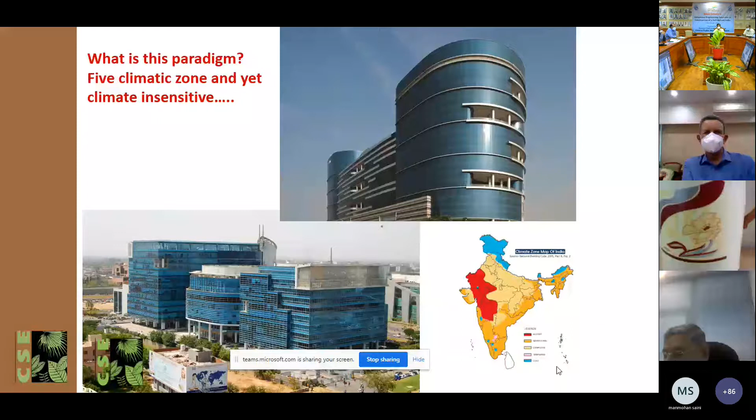Primarily, what comes out as a result is that we still do have burnt brick structures which are dominating. But when it comes to major urban centers like Delhi NCR, or even Kolkata and Bangalore, we do see that monolithic concrete structures are now making a lot of entry, and we also have certain environmental green materials in terms of fly ash and AAC coming along with it. So this is the landscape which is presented to us.

But the situation is that we are talking about something which is indigenous, what belongs to the local roots and could be utilized. So where is that landscape going to go? For example, in the last 2-3 years, we have seen a lot of migrants move back to their parent locations, and the housing industry was also disturbed to a great extent. But this poses a challenge as well as gives us an opportunity to recover, and to recover in a green way.

So why green recovery? Because we have to now sit down and understand - because we were there in our housing and we understood why we were locked down at home. We understood what works and what doesn't work in the kind of development we are in right now. So that poses a big question, and materials as well as technology become good answers for that. There is also a lot of employment opportunity associated with this, particularly with housing as a sector in mind.

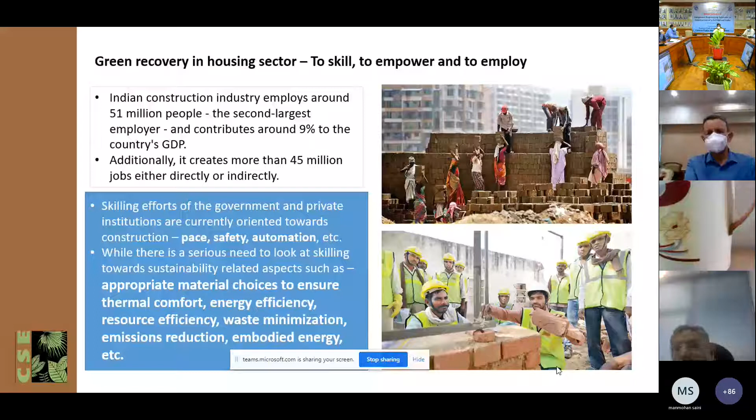We've taken an overall look at how this pandemic has affected things, as well as the economic dislocation and humanitarian crisis. So there are benefits by which a green recovery can help. Climate change becomes an important intervention. Improving thermal comfort, livability conditions, and maximizing livelihood potential are three important areas for us to intervene.

So we've taken a focus area coming from West Bengal and Orissa, because there were roughly around 5 to 6 states involved.

Have we lost his voice? Is there no sound coming? Rajneesh ji, you are not audible. Please rejoin again if you have issues, that may help. Call him and tell him, call and talk to him. We have some technical glitch, I think Rajneesh Sarin's microphone is not working. I think the presentation is also stuck, it's not moving forward, otherwise the slide would advance.

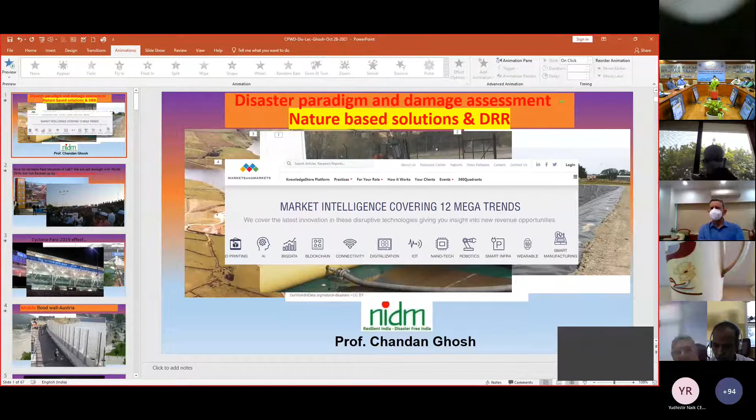What is this? Yeah. Okay, yeah yeah, okay, it is seen now. Yes, we can see it. Please continue. Okay, so let me speak in English or Hindi, mixed. You wish, sir. Sir, speak in mixed language, mixed. Yes, why speak so much English? Yes, when there's so much closeness in Hindi.

So my topic, of course you are all engineers, nothing new, but we all have been so busy, especially civil engineering, especially dealing with dams, probably the oldest thing civil engineers have handled even before we existed as a discipline. Dams were there for survival of civilization, with many uses, and of course a lot of controversies. My focus is on disaster paradigm and damage assessment, leading to mass scale construction, and what portion we as civil engineering fraternity handle so passionately, yet ignore so impassionately.

So in that respect, I will take things to the disaster paradigm. Even though we have codes, manuals, SOPs, guidelines, practical examples, pilot studies, performance studies, testing - so many areas of specialization, like in the medical profession also - still things happen.

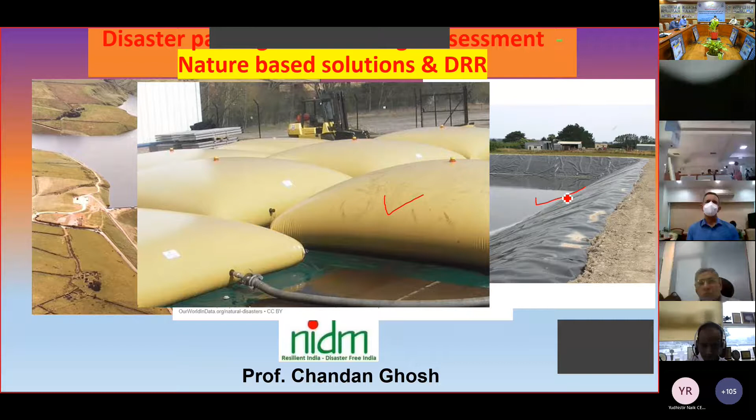But we are bringing these things now in an elaborate manner, since such construction is almost not possible these days. So alternatives we are searching for, and many alternatives are there. So while we talk of disaster risk reduction, there are many other alternatives. We as civil engineers, along with the community, depending on necessity and arrangement, look for low cost, minimum effort solutions rather than a gigantic effort. So we must go into some kind of micro storage before we take up disaster risk reduction into our life stream.

Despite that, the whole world is going into market intelligence, and we have been identifying the trends. In fact, these days, most of our engineering young students are moving towards computer and artificial intelligence, big data, blockchain, connectivity, digitalization. So this is software, all in all.

But when we talk about the hardware like this, we are not way behind, but we have to make ourselves aware of this. Even though we have done it, we are making 100+ story buildings or monuments and many other things. We have to come in.

Before going to show some glimpses of what has gone wrong or what might not go wrong, every year we used to have some kind of mock drill or building pull-up for disaster preparedness. We make it, and a lot of people participate, coming with an NIDM cap. So we do a lot of awareness at Pragati Maidan, which is getting modernized now. This kind of practice and awareness generation has been the hallmark of awareness generation across the country by NIDM and many other institutions.

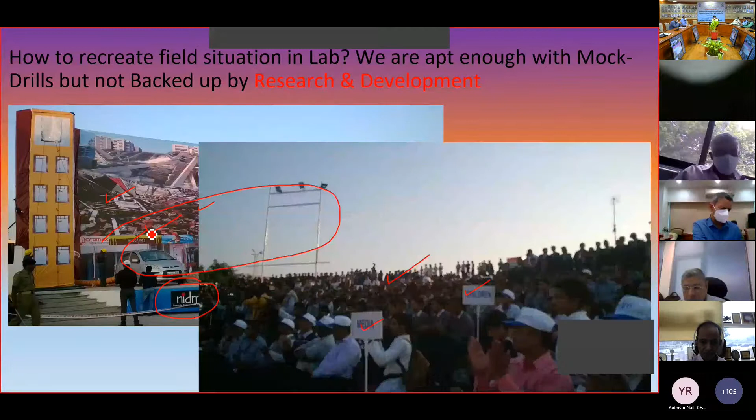But what is happening is that the backup by this kind of technique has not yet caught attention—it is simply a show, but how these things can be replicated, data can be taken, and sensors can be placed so that our search and rescue becomes more efficient—that part is lacking. IoT devices are getting more and more important, whether for fire, pull-ups, monitoring, health monitoring, and other things.

Just to show some examples: Cyclone Fani, 2019—the airport was there, then it got tottered, not because the airport itself failed, but because some of the items allowed to remain were not designed for torrential rain as well as wind more than 200 kilometers per hour. So we have to take such things into our design; we cannot make a system completely resilient with soft or non-structural material to withstand 200 kilometers or more speed of wind.

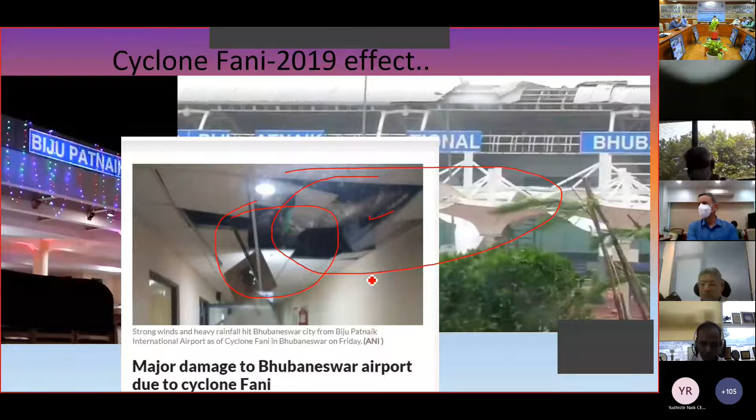So we have to allow them to fail like this, but we cannot allow things inside the airport to fail in this manner. So for that, what kind of flexible design is to be made? Still, we have not yet perfected this in our civil engineering domain.

After few months or few days, we restore it back, but by that time we have lost many things. There is no such assessment except an amount that, okay, one month we could not operate, but who takes the burden of refurbishing it to bring it back after one month, a few hours, or three days? What kind of effort is to be made in coming back to normal in DRR, disaster risk reduction?

Still, this has not come into the limelight in our civil engineering practices, especially damage assessment—not just pointing out the figure that 1400 crore we have lost, but what methodology can reduce this by making simulations, so that during 200 kilometer cyclonic speed, we don't have to keep the airport shut. We cannot change the direction of the wind, but we can facilitate the wind passing through—200 kilometer torrential rains and wind passing through the airport. That kind of computer simulation is plenty available these days, but we are yet to incorporate those in practice.

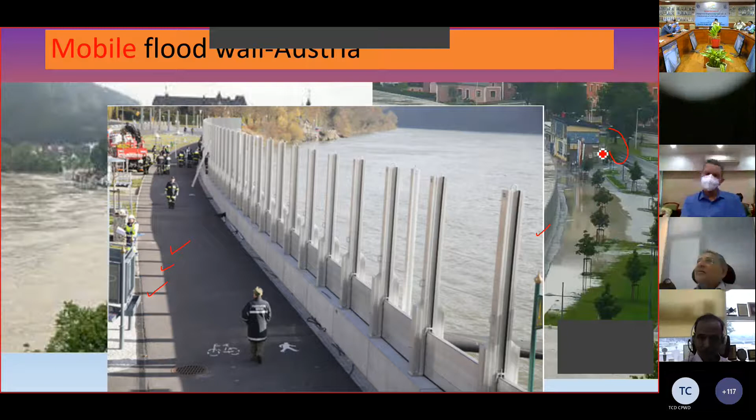Even Kochi airport, a 5-star platinum rated airport, got flooded—not because it rained so much there, but because some of the dams released their water without much synchronization as to which gate is to be opened and which is not. Here again comes surveillance as well as IoT devices, to determine when to release and in what way it can be channeled out so that we can recover. It took more than 14 to 24 days to come back to operation.

By that time, we had lost many things. So that gives way to the infrastructure report card. But since 1998 to 2021 in America, we have not yet started systematically, although certain exercises are being done. Data is there, efforts are going on in the country, but the American Society of Civil Engineers have taken this up.

They take about 16 such parameters and rate them as we grade our school children or even universities—C, none above C, above B. So what progress have they made over the years based on the previous report, which they do every 3 to 4 years? The overall grade is D+. You can imagine that the civil engineering fraternity, with so many professional organizations, where we feel proud of being custodians of making infrastructure, tunnels, and everything—

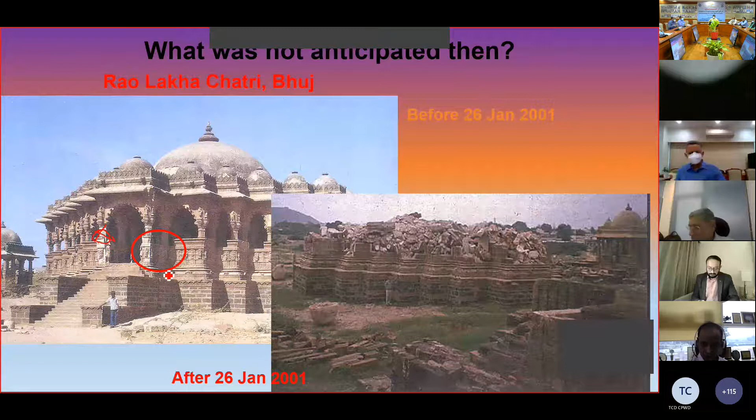But what has not been thought of so far, we still allow building plans. We pass building plans in our city with mandatory stilt for parking, with no such performance satisfaction, and it is silent in the code also.

We are showing as if we are helpless when such lessons exist, which are thousands and thousands of buildings with stilts that have failed. But there are ways to take care of the stilt, whether existing or new, which we have not yet implemented in our country's context.

Not only that, as a civil engineer, we look so much at what is seen over ground, but what happens in the soil, I would like to highlight in a few slides. Due to this, at Kandla port, one of the buildings, you can see how it has tilted. And what is the major reason?

Most of the cases, whenever disaster happens, flood or drought or something, we simply see how much more expenditure is to be made and how quickly we are going to make it all right. But what deprives us, or we are not emphasizing enough, is to look into the details of what caused it, what the back analysis shows.

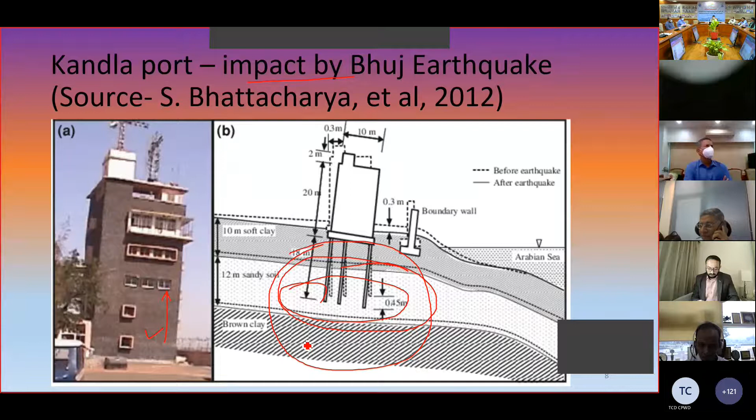Such research in our research laboratories, CSIR laboratory or IIT, is only going in a theoretical domain. So our appeal to practical engineers, those in practice, is to combine this practice and the knowledge available and being nurtured globally to solve this problem and design properly. Otherwise, the kind of structures we are making will be at risk.

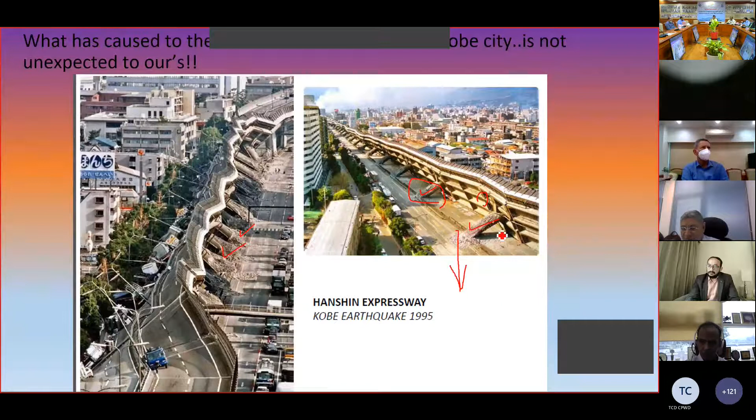If it is safe, we will say earthquake effects were avoided because resonance has not occurred. But with the kind of inverted pendulum structures we build, when intensity 7 or 8 or 9 comes, they are surely going to create havoc in our elevated expressways and other structures.

This bridge failed in June in Chhattisgarh, due to the monsoonal flow. If we make a structure like this and don't take care of this flow, scouring and other things in the conventional way, then probably we are failing in our duty.

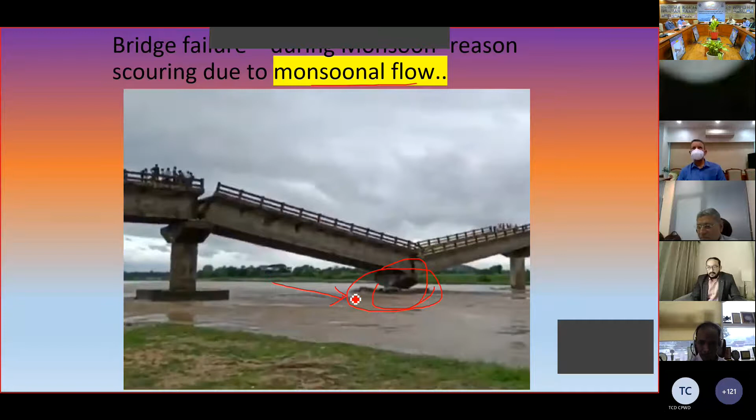By not taking care of its health while it is functioning. So when an earthquake creates such kind of failure, what are the retrofitting measures, strengthening measures, and safety measures of the existing structure that have to be taken?

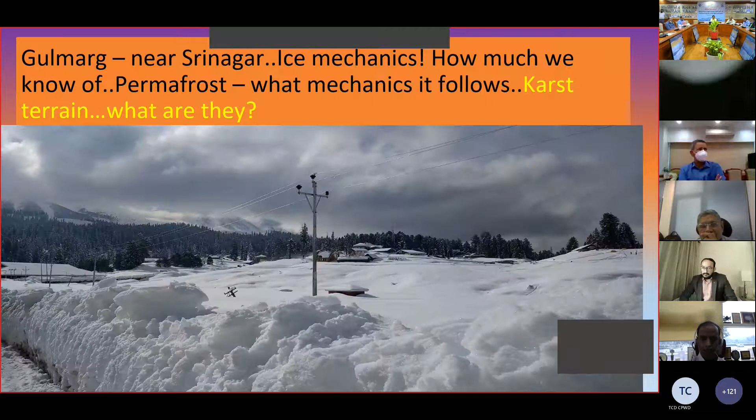We do not know many things about what is happening in geology and geomorphology, but what we are interested in is only the overground. So in that case, I want to give one or two slides on what happened due to heavy rainfall in the Coorg area, Madikeri, in Karnataka, showing the condition of the slide.

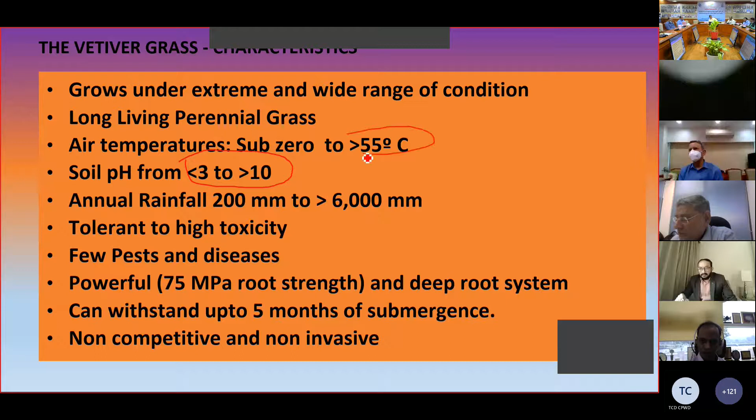It has revolutionized our way of thinking to look into nature, like nature-based solutions. It can grow in pH 3 to 10, and in temperatures from minus 15 degrees to 55 degrees. It can withstand any rainfall. So many such qualities are there.

Some applications show it can grow within a year or two, even up to 10, 11, or 12 feet. We can see a visible difference in slopes of more than 60 degrees, whereas we design our embankments at 1:2 or 1.5 ratios. It's just grass, yet we don't know the mechanics to explain how nature is able to give such a steep slope, which is the main key for stabilizing most of our roads.

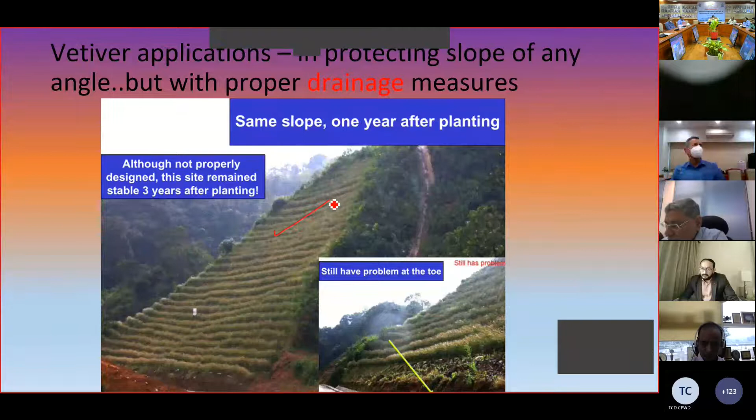We make our road in this way and construct such heavy retaining walls, whereas these natural measures are good enough to take care of it for a lifetime. We can change this approach using these natural techniques.

There are many such examples, in India and abroad, but we have to adopt them. We are still making roads in this manner, but we could put the grass here itself.

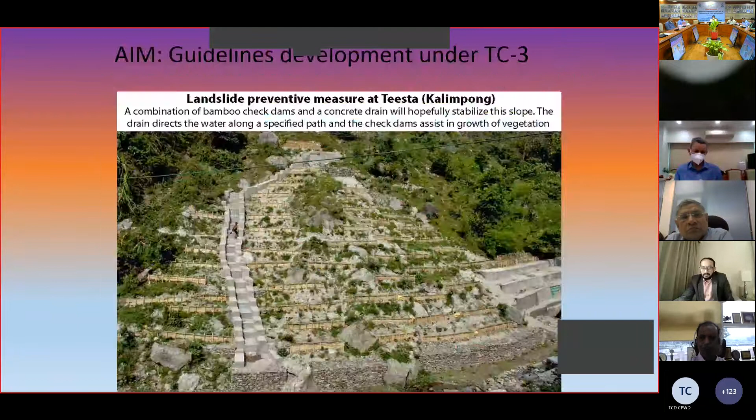So I would like to say that there are many ways, without retaining walls, using nature's own way, that we can make things possible, considering our country's economy, by using natural techniques. But there are failed cases too, not because the grass itself has failed.

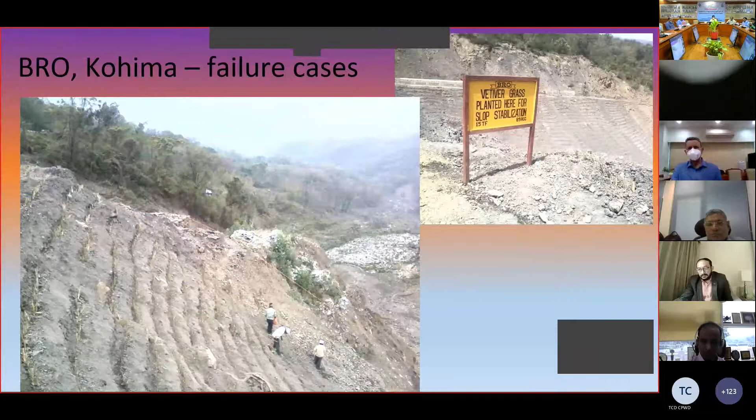I have shown you many examples. If water is not given in the first two weeks, it will surely die out. So there are ways like hydroseeding, which are also being applied in many places, allowing us to grow grass wherever we want. This technique is now being indigenized in the country, though it was originally made in the USA, and we can grow grass wherever we want with the right mixture of ingredients.

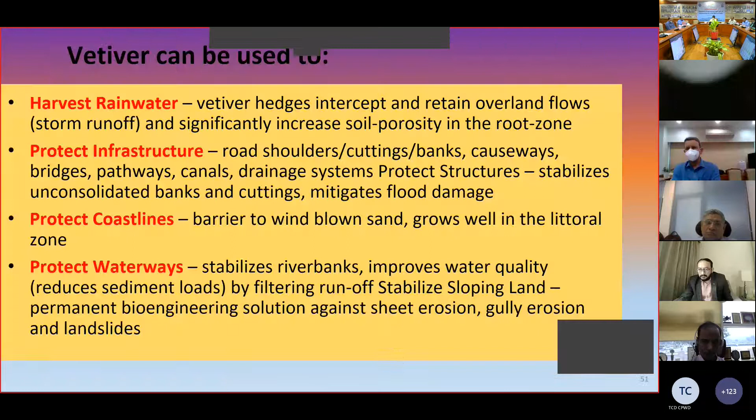And this research has not yet started in the country. So anyway, let me come to the end.

We can make such kind of stabilization by vetiver grass as well, where we spend crores. And this is in India, in Guwahati. And these are various applications that we have made it possible. We can check, we do research also on this, which vetiver grass will survive because it is a natural material. There are advantages, there are some disadvantages also, but it is a perennial and it has to be done just after the rainfall.

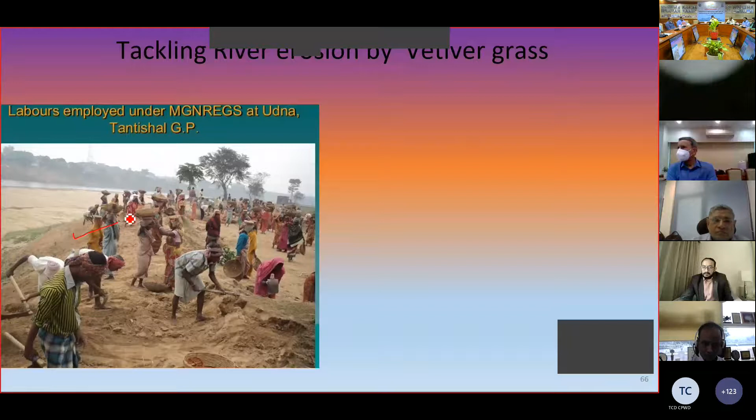And with the last slide, river erosions and other things that we look at using our MGNREGA workers, we can make it in this manner. Many such projects are being taken in the state of West Bengal and also in the state of, say, Karnataka. Let us march ahead with a natural way of taking many of the problems that we are facing in a right manner, in order to put a footprint to our disaster risk reduction measures, Sendai framework. Thank you.

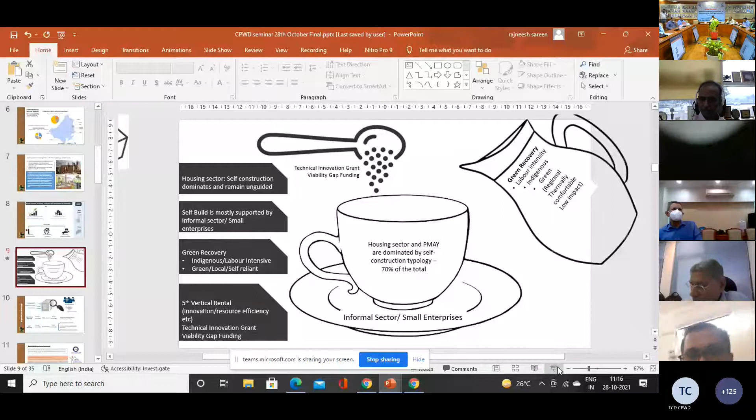Right, sir. So is the slides now visible and I'm audible to you? Yeah, yes. Okay, perfect. So I just parked the information on what exactly is happening.

The self-construction dominates right now under housing, so that means even in PMAY, almost 70% is also self-construction. Now this self-construction is mostly supported by the informal sector or small enterprises, which requires a lot of hand-holding in this. Then, the green recovery pitch I've already given, on why we need green recovery, because it is indigenous, labor-intensive also to a great extent, because though we get the speed also, but we get local materials. So green, local and self-reliant, which is the topic of today's webinar as well.

So, and then we do have new advancements in terms of financing, which is there with us. Like for example, the fifth vertical, which is the rental housing, which has been recently introduced. There are new ways of looking at things in terms of technical innovation grants, as well as viability gap funding, being also extended to these dimensions. So these are some of the mixes which are available.

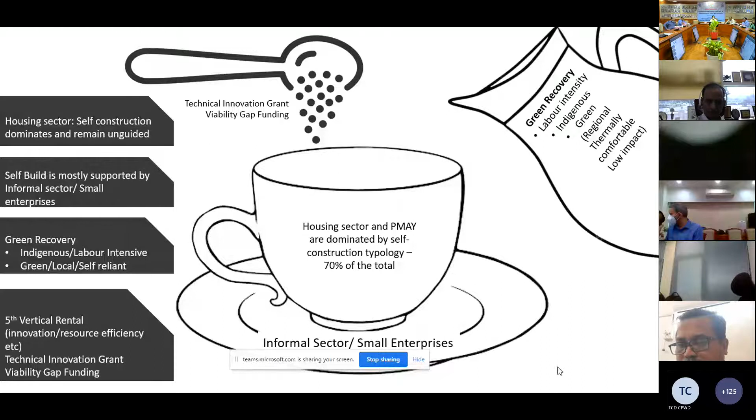To bring up a hot cup of tea from all this, we need to mix and do a jugglery for all this. So what we have done is we got a review of all the PMAY projects, done a lot of census penetration data, to understand what the materials are, how they are located, how green they are, and what are the labor intensities which are required.

And then we have done the expectation mapping of the public, to understand what expectations people have in mind, as well as mapping where those institutions are which can help map the skill which is required to bring these kinds of projects on the ground. So all these databases are being presented.

So for example, in this we see a lot of penetration of items other than brick. We do have other materials which are indigenous and are popular in our census data, as well as which roofing materials. One was on a wall, this was in a roof.

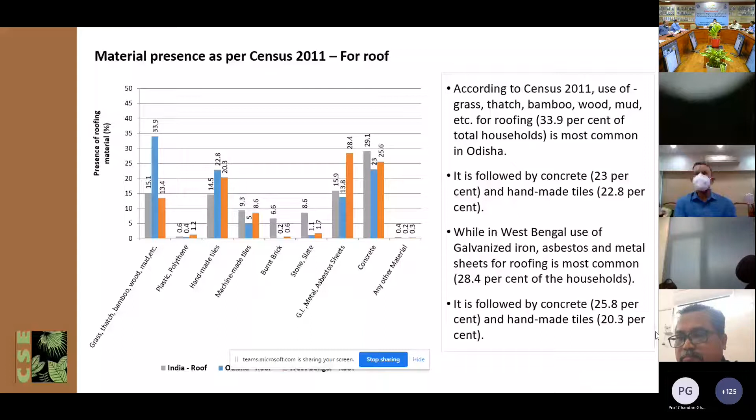So what we have done is we have done a repository of material across India, to understand where these materials which are native are being used. So for example, the one which I've shown you is for walls, and this is primarily for the roofs.

So various such materials technology spans across India are now available. For example, if I look at the graph of Odisha specifically, what we have done is taken the wall technology and roof technology, specifically mentioning their names as well as their presence across all the districts.

So this goes as a ready reckoner for anybody who's trying to, for example, CPWD looking for a project which has to be done with indigenous technologies. Immediately this kind of information and repository becomes one of the parameters to pick: what is available, what exactly is more popular, and what I need.

For example, Odisha becomes one of the important states because it has a prominent dominance of SC/ST population. When you look at the tribes, they have their own ways of making materials, similar to the presentation on disaster. So all our technology was done in such a way that they can adapt to the kind of disaster that was there, like the earthquake prominence, or the local temperature and conditions. These materials, particularly tribes, adopted accordingly.

But these require a retrofit now. You cannot use these technologies straight away into a combination of the new world. So the traditional and the neo-sustainable need to blend together. These are some of the compendiums which we've done.

So what we have identified are around 30 technologies which are traditional, neo, as well as alternate, many of which are making their presence now into self-built housing. For example, there are 45 technologies or more identified by BMTPC, but mostly they are being used for high-rise constructions. The ones primarily used for low-rise, we have also taken into this.

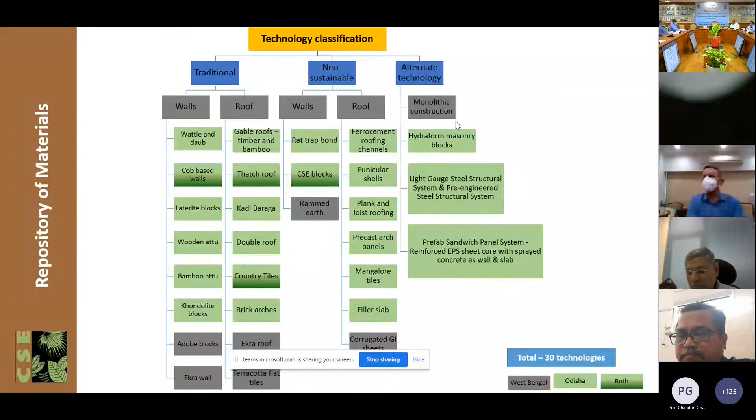So we are developing a kind of documentary technology documentation with samples also, where you understand what goes into the technology, what are the construction details, and according to which manuals or training materials will also come up. So every technology is being elaborated into further dimensions.

Now, the other area for us to intervene or look at is how these technologies are being taken up in terms of, for example, ancestral knowledge, or whether there are institutions or organizations working on this, because you require this. Otherwise you will not get the desired labor coming into this.

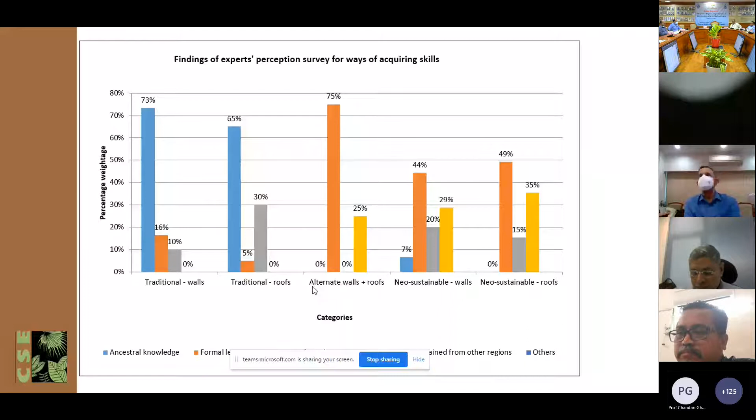So what we have done, for example in case of Odisha, is institutional analysis to understand, as well as the national institutions, for example CBRI, BMTPC, DA, HUDCO and all, what have they been doing in terms of various structures, and how they're helping these states.

And then we come up with even the training centers built across India, which are really pioneering and bringing this native technology and promoting them into the sector. Now, do we have information on what the technology is? We have information on where the skill centers are available.

Now we have to look at the demand. So we've done the market assessment to understand: is there a demand for the material? Do people recognize these materials or not? What we understood is that people are aware about the material.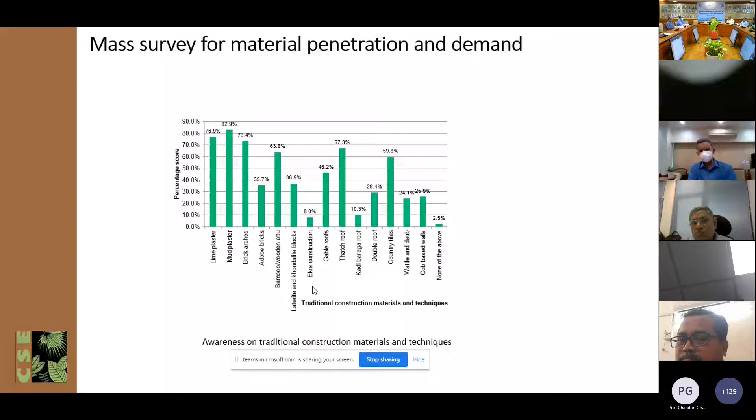People are looking at, for example, saying they need government policies to push this. They are looking at how this landscape will change when you have more material availability, more skilled labor available, as well as needing to be more aware about the cost part of it.

So the cost, the kind of availability of skill, and all these things become important, and people are ready to spend money. We checked with them - almost 40% of the respondents, out of around 600 samples we took, are ready to spend even up to 10% more. Similarly, when people make their own houses, they are willing to construct in a traditional or neoclassical way.

So what we have done in order to resolve this is bring up a dashboard, which is going to be freely available for people. For example, in West Bengal, you pick the state, and you look at the kind of roof, fenestration, or walls you are looking at.

So automatically this dashboard will start populating the technologies in front of you. You pick up any of the typology, and the moment you click on the technology, you get the video, audio, and the write-up setup for it. I have given you a sample of the write-up. So these are the ways when we connect these dots together.

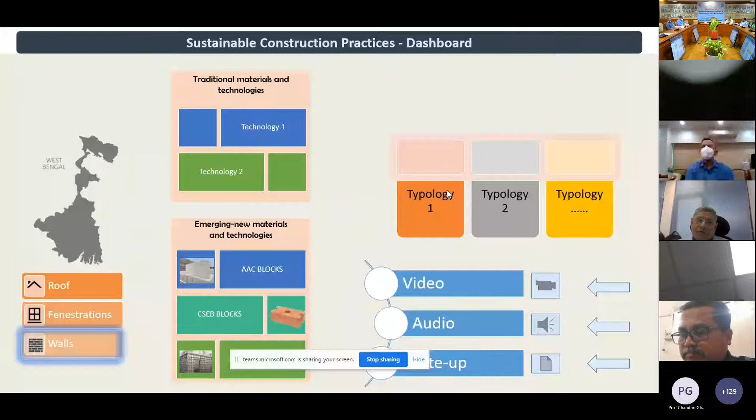We need to connect these dots because this information is there. There are many projects where CPWD has used native technologies, especially recent interventions regarding thermal comfort, where we've tried to blend them together with our new techniques and setups, blending those old philosophies and methodologies into it.

So this becomes one of the very useful ready reckoners, since currently we lack a lot of information regarding this. So we made a little dashboard available. We will soon be bringing it up, where you select the budget, select how that house should look, and it populates the kind of technology according to your region, giving you the costs and details.

Like, for example, this eco homes, or whatever title we try to bring up for it, so that at least there is information and a database available to people.

So the final submission from our end is that there is a great opportunity for skilling on climate appropriate materials, because it's something very native, passed from generation to generation. It's traditional knowledge, but it needs to be brought into frame, because this is the way people are going to make their life more sustainable and equitable, changing their thought processes. Otherwise, we remain centric to the centers.

For example, what we have seen is that during the labor movement, at the first hit of any disaster, the migrants started moving back to the villages, because the cities could not afford them, both in terms of infrastructure as well as appropriate economics which they required at that time.

There is plenty of knowledge resource on climate appropriate materials which needs to be tapped into. Whatever resources we are taking, it's not that every time CSE is researching - there is a lot of information from national institutions as well as from CPWD which is available. We are plugging those dots together.

Unlike our other successes, which are very laudable and great, the construction sector's impact on sustainability is enormous. So now, in the changed world scenario...

I think the whole humanity has decided to fight against global warming and climate change. One of the important aspects of controlling global warming and sustainability is that we limit global warming to 1.5 degrees above pre-industrial levels. And our urban systems require transformation.

I think Professor Chandan Ghosh adequately reflected that our urban systems require not just some nudge, but total transformation. Now, how are we going to tackle it? So, countries put forward mitigation commitments in the form of Nationally Determined Contributions.

Our latest report, the India Third Biennial Update Report to the United Nations Framework Convention on Climate Change, states that the emission intensity of India's GDP has reduced by 24% over the period between 2005 and 2016.

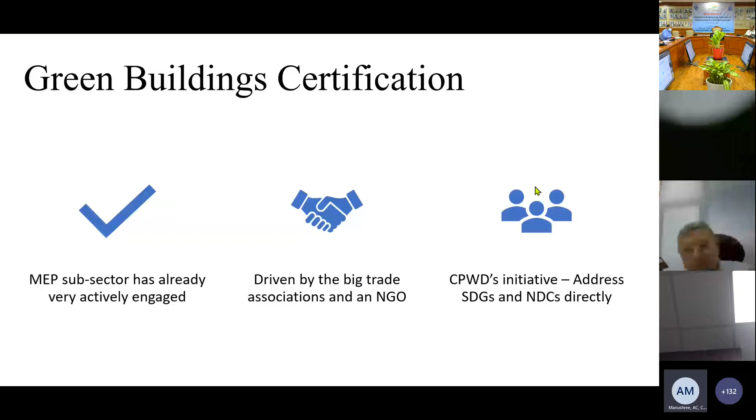Wonderful, great research has been done, isolated, by these institutions, and we must utilize it. They have been utilized partly, but I think we need to think big and build over on the great work done by our institutions. Now coming to how it can be done. I pointed out in the beginning that it has not been done. So how do we do it?

Our suggestion is that, like other traditional sectors, we are divided in silos. So breaking silo boundaries and using the true intent of our National Building Code is important. I think all of you must be aware that in 2016, Part 0 was introduced in our National Building Code, which stated that you must have transdisciplinary, interdisciplinary teams, and they should be in place from the very beginning, from the inception of the project. But unfortunately, that has not happened.

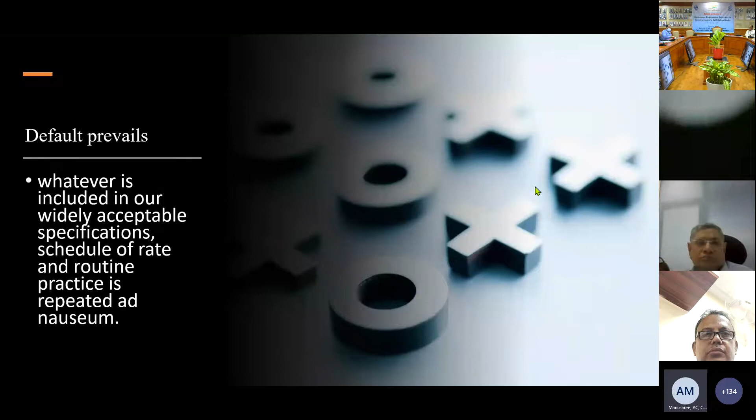Green buildings have great examples, but I think they remain demos, right? Enclosed buildings, on the other hand, have gradually become a norm, which may not be desirable.

The bottom line of government as a policy driver would be involving construction field professionals in the building innovations and research process. The main point is why this has not happened, why research has not been translated into practice. Our hypothesis is that we have not involved the field professionals in the research.

Both authors of this paper were involved in the inception training of architects and engineers, and we took these professionals to various research institutions. When we went to Dehradun, there are two or three very prestigious research institutions - FRI, IIT Roorkee, and CBRI.

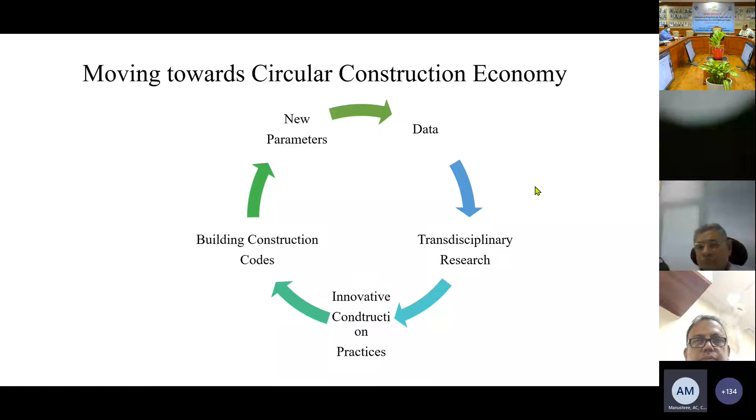New parameters will come, which will give more data, and this cycle would run continuously, ultimately leading to our circular economy.

So we come back to lessons learned, about our successes in the past. I would request my co-author, Shri Manoj Sharma ji, to take over from here and complement whatever has been said.

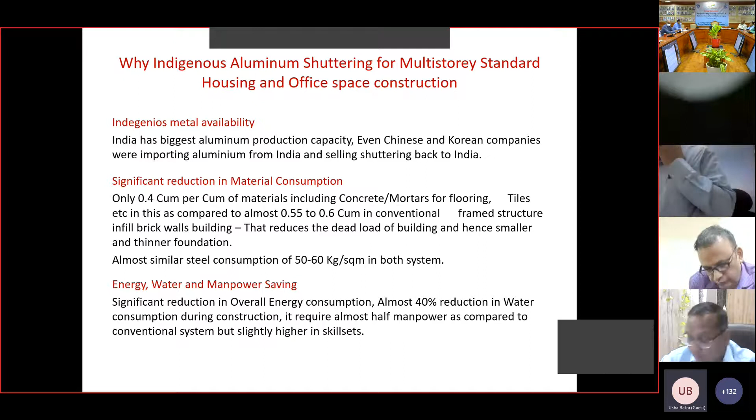That's the biggest advantage. I have analyzed that only 0.4 cubic meter per cubic meter of materials are required in a multi-story group housing project. It may be different in commercial or industrial projects, but in a group housing project, only 0.4 cubic meter per cubic meter of the floor area, we require the materials.

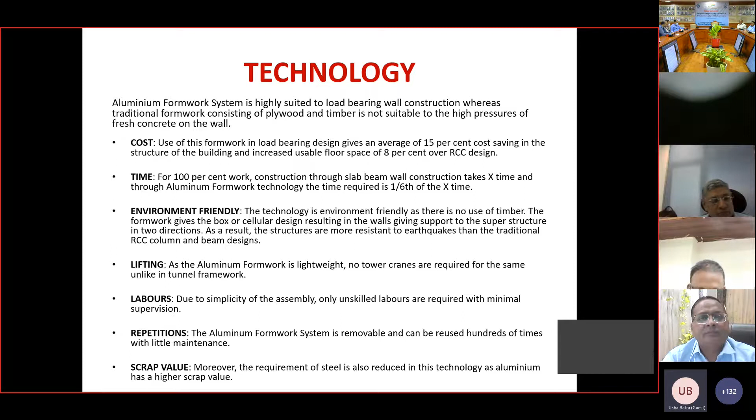इसकी असेंबलिंग बहुत ही सिस्टम में बहुत सिंपल है, इसे बहुत ही आसानी से असेंबल किया जा सकता है। थोड़े से अनस्किल्ड लेबर को थोड़ी सी ट्रेनिंग देके हम काम करवा पाते हैं। पिन एंड वैज सिस्टम होता है जिसमें ऑटोमेटिकली पिन ठोकने से वो ऑटोमेटिकली टाइट हो जाता है, और अगर उसने टाइट नहीं किया तो दूसरा पैनल नहीं लगेगा। तो इस तरह का सिस्टम है कि सेल्फ करेक्टिव है वो।

दूसरा एक बहुत बढ़िया इसमें क्या है कि इसमें प्रॉप्स को वहीं छोड़ के हम बाकी की सारी शटरिंग रिमूव कर सकते हैं। इससे क्या फायदा होता है कि प्रॉप्स वहीं रहता है और अगला...

तो इसकी स्पीड बहुत अच्छी है, क्वालिटी बहुत, जो फाइनल फिनिश क्वालिटी आती है। अभी कंक्रीट टेक्नोलॉजी में बहुत एडवांसमेंट हो गया है। ऑलमोस्ट एवरी पर्सन यूज़ेस द डिज़ाइन मिक्स कंक्रीट, इन द एंड हैविंग द कंक्रीट प्लांट एट द साइट और एट द फैक्ट्री टाइप ऑफ सेटअप है। वहां पर कंक्रीट का क्वालिटी कंट्रोल बहुत ही अच्छा होता है, और उसकी वजह से M30 से M40 या M40 से M50 बनाने में जो कॉस्ट का वेरिएशन है वो बहुत कम होता है। ऐसा नहीं है कि M30 से M50 जाने में डबल हो जाती है कॉस्ट, इट हार्डली इंक्रीज़ेस बाय 300-400 रुपीज़।

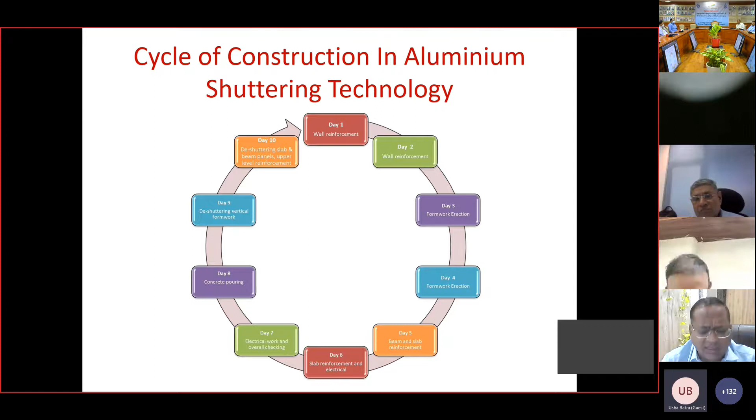It can be achieved in 8 days at places. We have achieved that also, but that is the standard I am following.

So what is the necessity? क्योंकि आज की डेट में हाउसिंग पे एक बहुत बड़ा थ्रस्ट है सरकार का, और हमें चाहिए कि बहुत ज्यादा मास हाउसिंग हम करें और क्वालिटी हाउसिंग करें जिसकी लाइफ बहुत ज्यादा हो। ऐसा ना हो कि 3-15 साल बाद फिर से हमें बदलना पड़े उस हाउस को। लो क्वालिटी हाउसिंग नहीं चाहिए, तो हमें ये मेथड पे जाना ही पड़ेगा।

दूसरा, हमारी लैंड रिक्वायरमेंट बहुत घट जाती है बिकॉज़ इट इज़ सुटेबल फॉर मल्टी स्टोरी हाउसिंग ओनली। बढ़ती हुई पॉपुलेशन में हमारे पास लैंड अवेलेबिलिटी बहुत कम है, तो इसके लिए भी बहुत ही अच्छा सिस्टम है ये। फिर इसमें स्पीड के साथ क्वालिटी आएगी, क्वालिटी कंस्ट्रक्शन आएगा, सब कुछ कंट्रोल्ड रहेगा, वो बहुत अच्छा है। इंडियन कंडीशन में मास हाउसिंग के लिए सबसे सुटेबल सिस्टम है।

What is the advantage? No plastering required, saving on overhead expenses and speedy construction, monolithic, crack-free structure, does not require timber or plywood. Casting of wall and slab always simultaneously, hence the total system forms a complete concrete structure, floor slab, forms removed without moving props, earthquake resistance of the resulting structure is increased very high.

The formwork is specifically designed for rapid construction on all types of architectural layout and custom design to suit project requirement. The system becomes cost effective where there is considerable repetition of floor layouts. After 50 cycles of reuse of this formwork, we will reach the break-even point compared to the conventional shuttering.

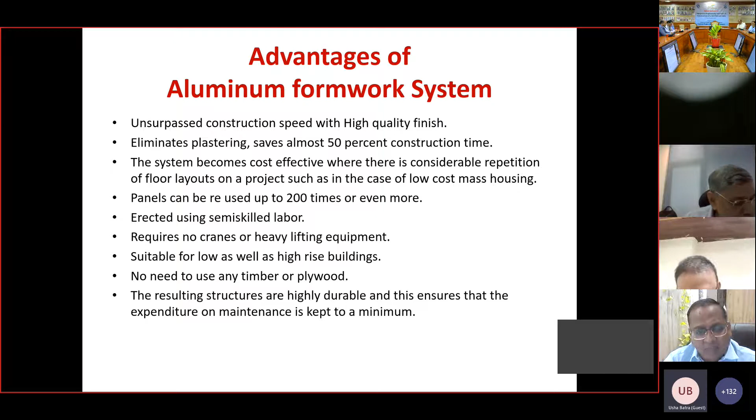The unsurpassed construction speed with high quality finish eliminates plastering, making the system cost effective. The panel can be reused 200 times. It is erected using semi-skilled and skilled labor, requires no crane or heavy lifting equipment, and is suitable for low as well as high-rise buildings. There is no need to use any timber or plywood, resulting in a highly durable and very cost effective structure.

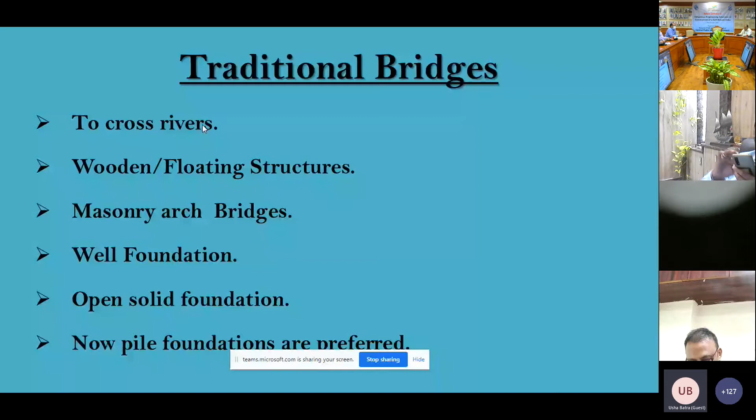Now pile foundation is preferred because technology is available. Then this is the story of the superstructure - thin and lighter structure. Earlier heavier structures were used. Now single pillar bridges or flyovers are being constructed, and Delhi PWD, part of CPWD, is the pioneer for single pillar flyover bridges. We have constructed spinal beam structures.

Pile foundation instead of well foundation, and extradosed bridges instead of suspension cantilever bridges. You might have heard of the suspension cantilever bridge - the example is Patna Gai Ghat bridge, which was a suspension cantilever bridge, but now the new bridge in Patna is an extradosed bridge only.

These are our traditional bridges or flyovers. What I am going to cover is that when we make an elevated road or flyover, at ground level we were occupying around 20 meters, and on top we are giving 24 meters. So the same space was used on the ground and almost the same on elevated.

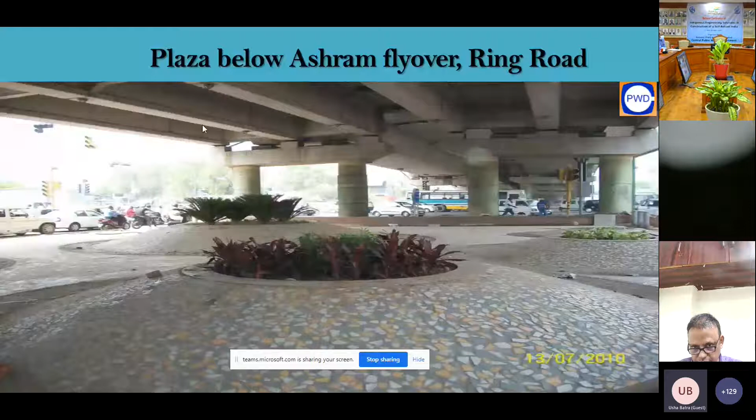Earlier we made the Naraina elevated road, 2.5 kilometers, but due to lack of technology or lack of awareness, on ground we occupied 20 meters and on top we created 24 meters. But in these new elevated roads, we have occupied only 3 meters in the center at the bottom, and we have created 24 meters on top.

This is another view of this elevated road, and this is the new technology which I will be covering in bridge and flyover construction - thin and lighter structure, single pillar bridges and flyovers, a spinal beam structure, pile foundation instead of well foundation as I already told, and the extradosed bridges which is the latest.

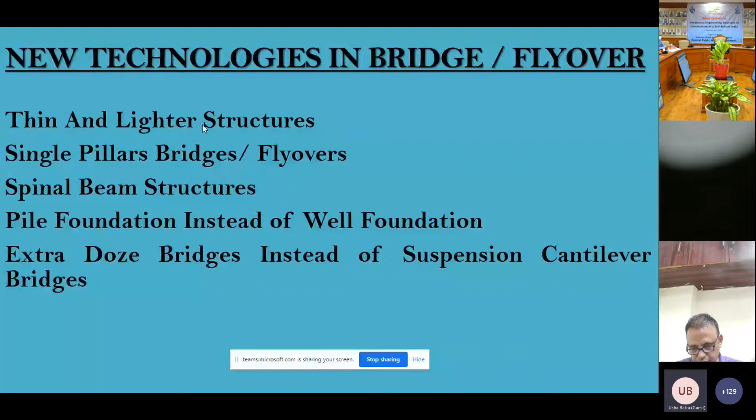I want to share my views on this new technology, which we have used to make new corridors from Vikaspuri to Mukarba Chowk, outer ring road. In total, in Delhi we have constructed around 14 kilometers of road with this technology, which is very simple.

Normally for a flyover or bridge, the load was transferred from pier to pier or from abutment to abutment, and it was mostly a one-way slab. The thickness from one end to another remains constant. If we make a 40-meter span, the normal bottom depth of the beam was 2.8 meters.

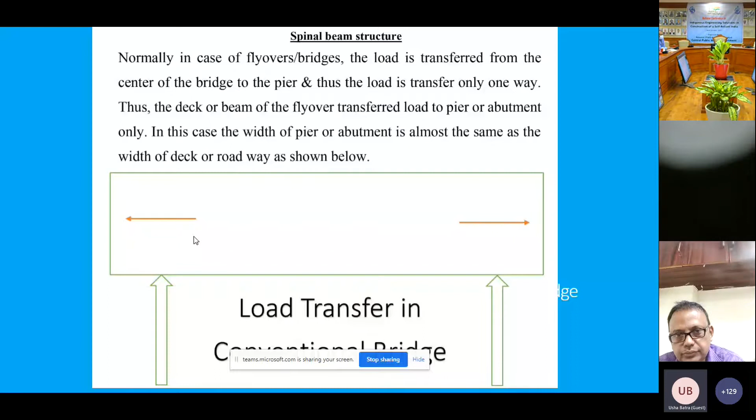In this spinal beam, or two-way mechanism of load transfer, the main load is transferred to one single pillar through one longitudinal spinal beam. The load is transferred from one edge to the center this way, and you will see this wedge - this much structure is reduced.

This much structure is reduced, and by this reduction of structure, the weight of the bridge is also reduced by 25%. By reduction of this weight itself, the concrete is reduced, our piers are reduced, our foundation is reduced, and overall we save around 25% of the concrete, and overall 15% in savings.

This is the theory - this is one pillar, and this is another pillar, and one spinal beam is erected in the center. This you can see, this is the first part of the spinal beam.

Of course, all beams and everything is segmental only, and this is a cantilever portion, known as the flange. This is erected first. The erection system is to be followed - first we erect one wing, then to keep the balance, the other wing is erected.

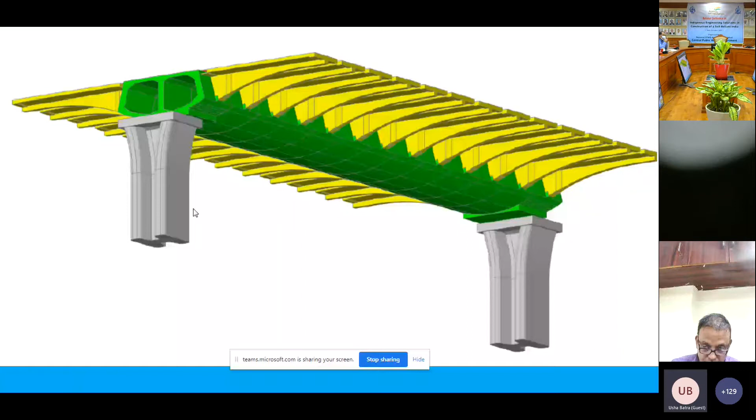You will see that concrete is reduced in this section, and this much reduction in weight means saving. This is one sketch, the final sketch. Again, the concrete which was earlier here is now curtailed down.

This is the view of this cantilever wing segment. These are the wing segments, and here the thickness of this portion is only 20 centimeters, while the thickness of this beam is 2.8 meters over the center, because the load is transferred in that way.

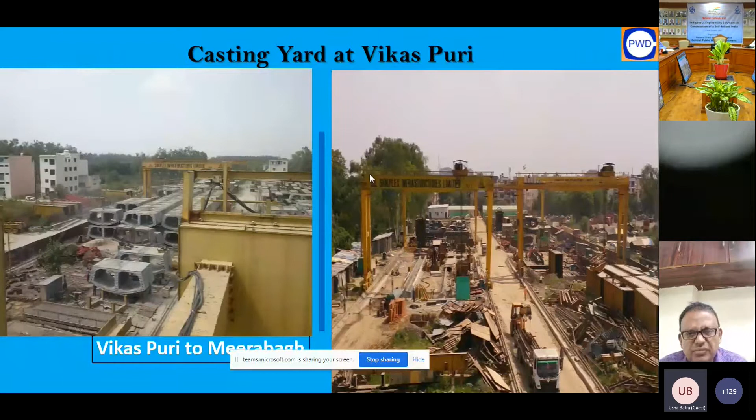These are the construction stages. This is the actual figure I have taken from Vikas Puri to Meerabagh, which was constructed between 2013 and 2016. This is the construction yard at Vikaspuri, showing the spinal segments in the casting yard.

The height of a segment is around 2.8 meters, and our span was 36 meters. These are one wing segment, and this length is around 9 meters, and this height is 2.8 again.

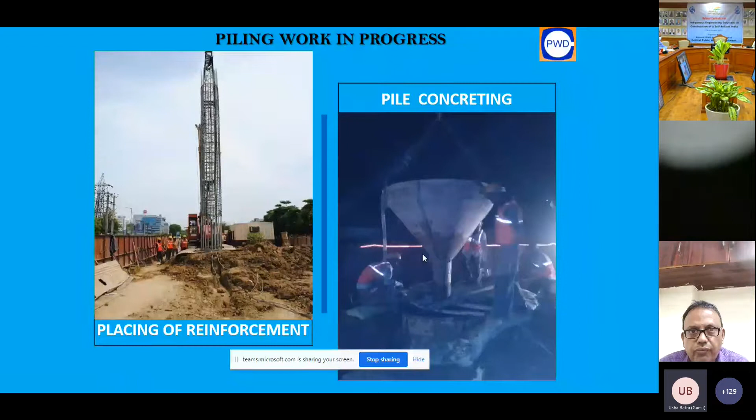This is pile cap work, and this is again casting of a pier. Again, the final shape of a pier for adjusting the final shape.

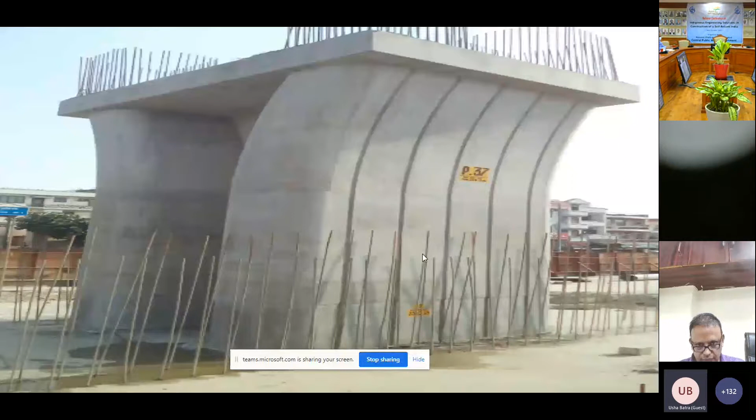This is the erection, and erection is very typical work, and we have to be very careful. If we don't follow the proper methodology, it may create a problem. There was some accident also in Bombay where this spinal beam was being constructed. The work was being done by L&T, and due to hurry, they made some mistake in following the methodology.

Due to not following the methodology, it created a problem, and some accident took place there. The main theory is that whenever you fix these wings, the counter wings should also be fixed before moving further to the launching girder.

This is erection of the central spine, which is one of the typical processes. Again, a view of this spinal beam. After erection, you have to stress it. The stressing is done first, so that one spinal beam is completed before erection of the wings.

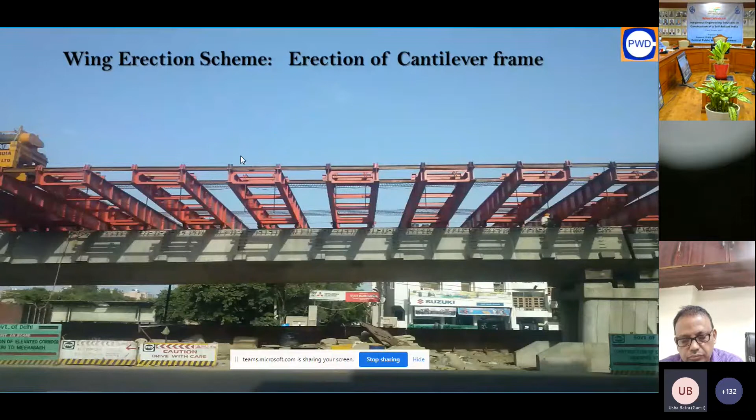Then wings are started, and it is done from one side to the other side. The whole span cannot be done at once; normally it is as per the design methodology only. Normally, 2 wings on one side and 2 wings on the other side - this is the theory we normally follow.

This is the carrying of a wing, because the width of the wing itself is 9 meters. This is erection of a wing, and this is again the erection system. You can see that we have erected this side and this side first before completing the whole span.

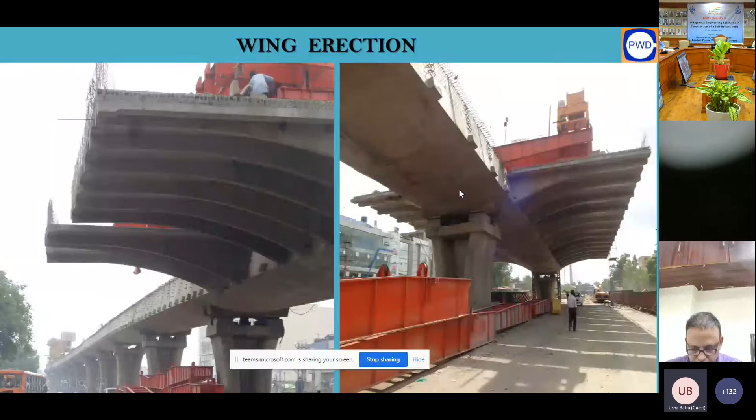This is the theory, and here the complete stressing has been done. All segments have been stressed, and then cross stitching, or cross stressing, is done, and this is the final shape.

These are known as stitches, where 2 wings are connected to each other, but a gap is left around it so that it is done cast-in-situ, to keep the top surface even. Otherwise it may create a problem. This is the bottom view of stitching.

This is one wing, and this is another wing, and the gap between them is around 2 to 3 feet - in our case it was about 75 centimeters. This is done only cast-in-situ, so that the match fixing is done. This is again the lateral stitch between wing segments.

This is the final stressing, and this is again the longitudinal stressing.

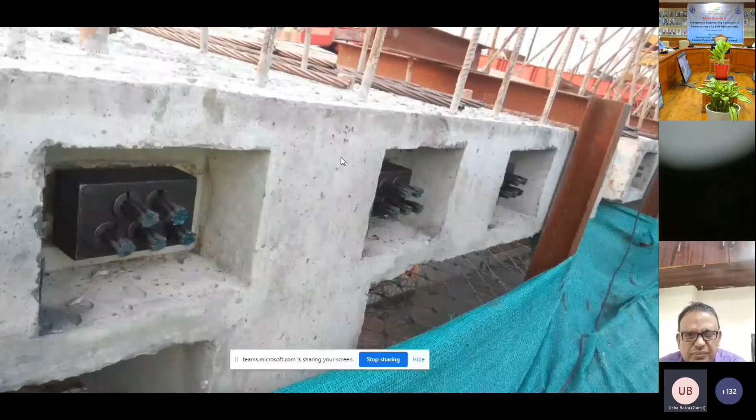This is another view of the stressing. This is the final stage, ultimately this is our spinal beam which has been erected before erection of the flanks, before erecting the wings.

And now the wings. Erection of fascia panel. This is also a typical exercise. We should erect this and then another side simultaneously to keep the balance. Erection of fascia panel of crash barrier.

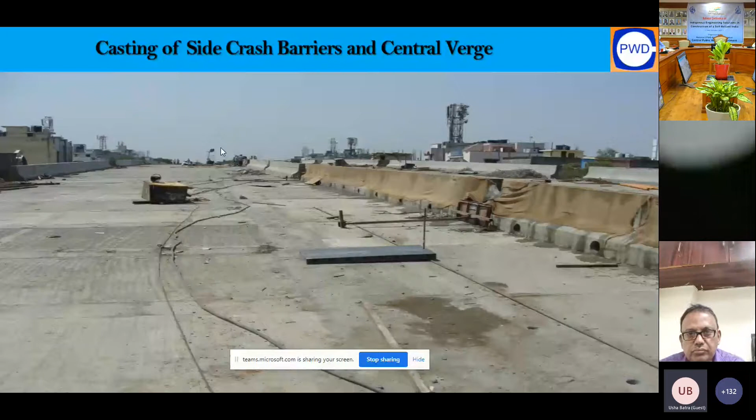Casting of side crash barrier and central verge, because it is done in situ. This is the wing wall. This is the final shape over that. And this is the final shape of the bottom view.

Again, a bottom view. You see that we have occupied only 3.5 meters in the bottom, and the top width is 24 meters. Ultimate top carriageway is 24 meters. Almost the same 6-lane traffic is above, and the same 6-lane traffic is below.

So this way we have added the extra carriageway. Earlier it was not this. This is the final view. Earlier it was the phase where on ground we were just occupying like this. Just this is another, some other photograph of Delhi.

But before going further, I want to just say that the decision is to be taken by us only. Nobody will suggest anything except the departmental persons. We have to be very authoritative also, and very careful also while selecting the technology.

While implementing this technology, we have followed a foolproof method. I put one consultant for designing, one for proof checking, one we have taken third opinion from the IIT, and then fourth as an expert also before going to implement this.

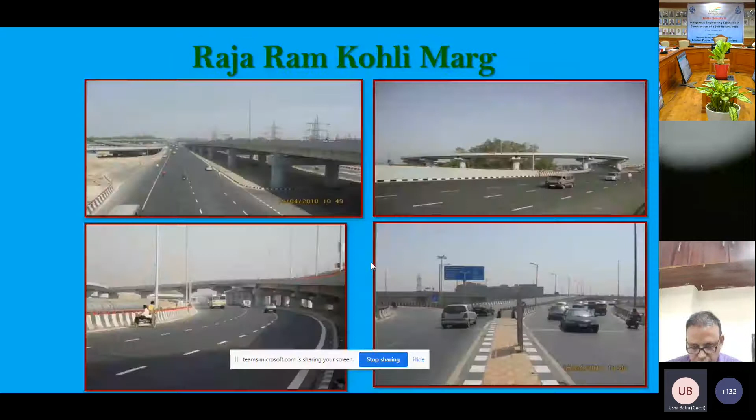These are just flyovers at Apsara border, grade separator. These are just another views of the structures which Delhi PWD, part of CPWD, has done. Gazipur crossing, NH24, grade separator Anand Vihar, subway at Vikas Marg, and this is the new FOB. Again, FOB. This is one FOB at Gazipur. We can say this is a suspended bridge.

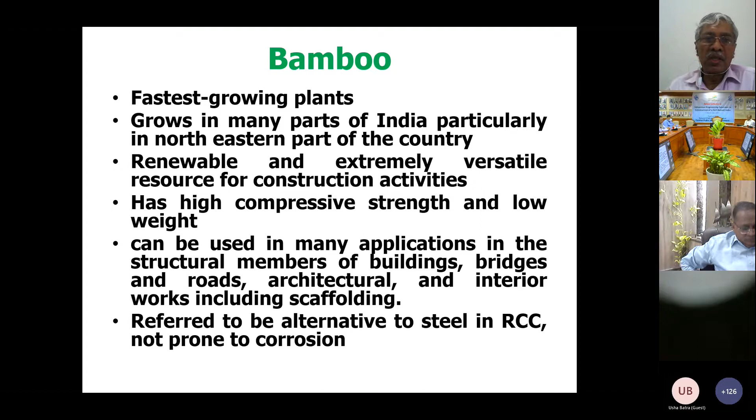Now, what are the drawbacks? Everybody may be thinking that bamboo can be used. We know bamboo is quite fragile, and it is prone to cracking and splitting, particularly along its core. The joints in bamboo are called nodes, and it is not open from inside between the nodes.

So that has a small issue, we will have to see how it is handled. Second, we know that this material is liable to insect attack. Why is that? Because it has starch. Everyone likes sweetness, so insects like it too. So if this starch is removed, then it becomes durable.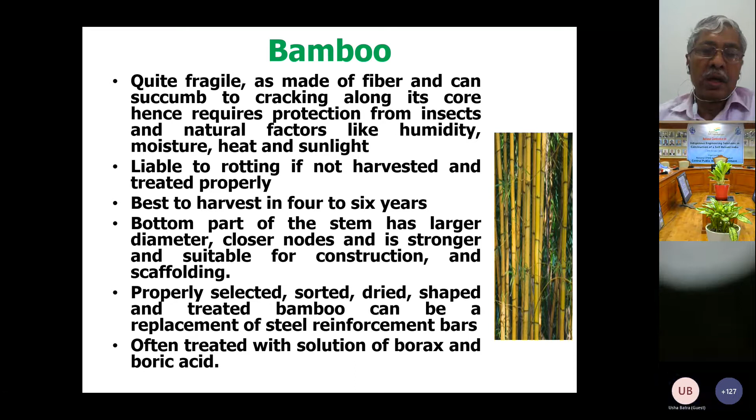As I told you, treatment is very important in case of bamboo. Normally, you will see in the literature that it is done with borax and boric acid. A solution of borax and boric acid is taken, and then bamboo is dipped into this, or there are some other methods. That way it is treated, because nowadays natural treatment is hardly done.

The advantage of bamboo as a building material is that it is lightweight, cost effective, and non-toxic as a green material. It has high tensile strength, almost as much as mild steel, and has a higher capability to resist fire and is non-corrosive, so it becomes durable.

Let us see how durable it is. It is said that it has a service life of easily 50 years, but there are some structures where it exists beyond 200 years. We will not say 200 years, but treated bamboo can have a service life of about 50 years or more. Not all bamboos can be used, because it has to be treated. We must remember that only when we take out the starch and treat it does the bamboo become durable.

Then there are precautions for use of bamboo. We should avoid direct contact with soil, because soil may have certain chemicals that affect the bamboo. If it is to be used along with soil, it should be coated. Generally, the economical coating is through bitumen. Also avoid use underground without protection, as I have already told. And do not use nails. In timbers we normally use nails and screws, but in bamboo this should be avoided.

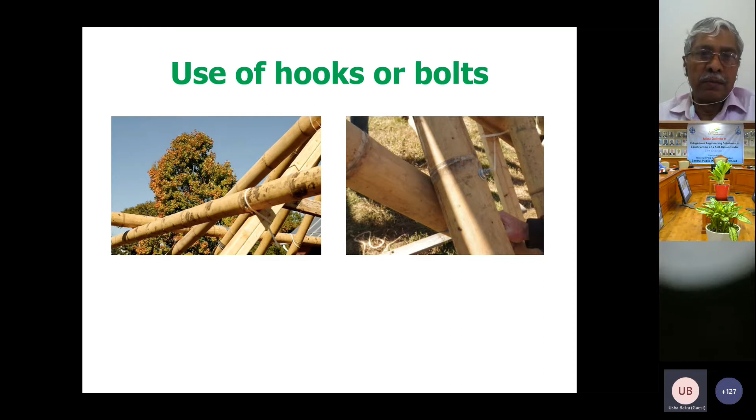Bamboo is to be selected. There are a large number of species of bamboo around the world, but only selected species can be used in construction. Some literature says 3 to 5 years, but mostly if we have a maturity period of 4 to 6 years, then matured bamboo can be taken and treated.

Normally, at the root side it is not cut right from the root; some length is left, and the diameter should not be less than 100 mm, that is, not less than 4 inches. We get a length of about 4 to 6 meters. Even when we used bamboo in Shanghai, it was about 6 meters in length. Remember that there are only some species suitable for construction.

Now coming to preservation: as we have told, treatment is required and essential. As I told, there is a solution or mixture of boric acid and borax, generally taken in a 1:1.5 ratio. This has the advantage of not being very toxic, whereas there are a large number of other chemicals which are said to be toxic, so normally we don't use them. But wherever toxicity is not a problem and it is used inside, it can be used. Otherwise, it is general practice that this boric acid and borax solution is used for the treatment of bamboos.

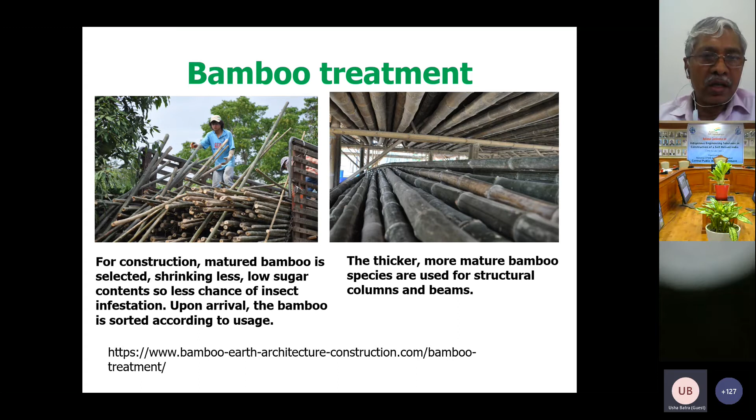This was interesting. For construction, you can see on the left, they are just sorting the mature bamboo. As I've told, this is thicker at the bottom and thinner at the ends. So what they are doing is taking it, and then you can see they are drilling along the total length of the bamboo, and then putting it longitudinally in the store.

Then they are putting it in the tank for treatment. Once it is treated, they take it out and stand it vertically like this, so that the solution will drain out, and this is rotated because air drying should be done on all sides. So it is rotated normally, and after rotating, it is stacked and ready for use in structural members. This is quite interesting.

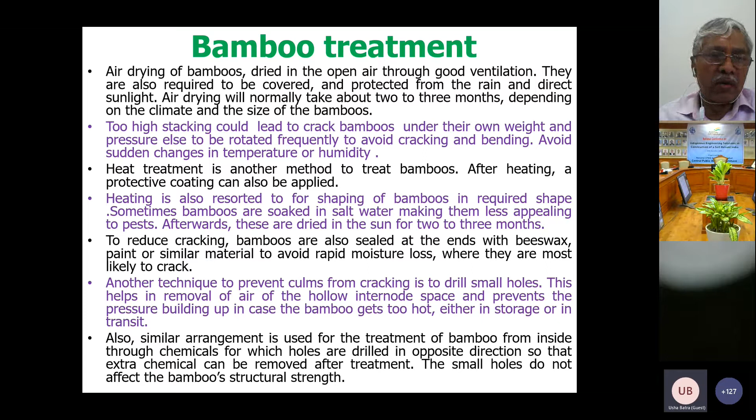So as I told, after drying bamboo can be used, and some of you may have already seen the treatment of bamboo where air drying was done, but that is not done nowadays. Now it is done commercially.

Now we have already discussed processing. It is to be sorted, dried, shaped, and treated. Again I am saying, please do not use untreated bamboo, and treatment should be done from outside as well as from inside. Inside is more important than outside. So that is to be ensured.

Now there are a large number of bamboo species available, but for construction they are limited. As I told, in India Pavilion Shanghai we used Moso bamboo. But in America, Central America or Latin America, species like Guadua or Chusquea are used. In Maharashtra schedule of rates, as I was telling, in Nagpur they are using Bambusa bamboo, and that is available in their schedule of rates now.

Now I searched the literature to see where research is going on. This is just at research stage, I will say. Bamboo is being used in footings, walls, columns, beams, and slabs.

The persons who have worked in the Northeast, particularly in Assam or the northeastern part of the country earlier, know that we use woven bamboo strips and do plaster from both sides in walling. But nowadays in monolithic construction, we are using steel for the walls. Probably in future we may replace this steel with solid bamboos, meaning total bamboos without splitting. That is also possible. Traditionally we are using it, that is not a big thing, but for non-structural members.

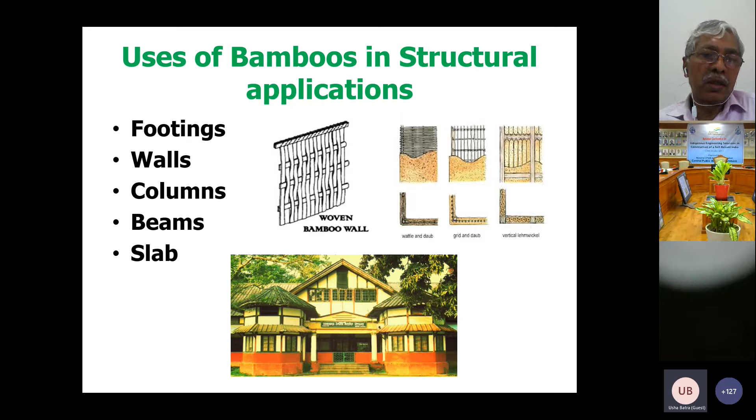Nowadays a lot of research is going on in all fields. You can see that people are now researching use in columns, beams, and slabs. And one thing I will say is that some researchers are still trying to use bamboo as reinforcement in RCC construction.

But I don't know whether we should go for use of bamboo in composite construction, meaning all bamboo inside, with concrete only from outside. So it is durable and not directly exposed to weather conditions. That is also to be found out. But you will see people are now using it—in the northeastern part, they were using it in posts, in beams, and all that.

So, they are quite durable structures.

Now I'll take some time to tell you how this was used in Shanghai. We were told to construct the India Pavilion when I was working in the Ministry of Commerce, that is ITPO, Maidan. So then our consultant told us that we'll be using bamboo in construction, and we'll tell the world that we can use bamboo in structural members.

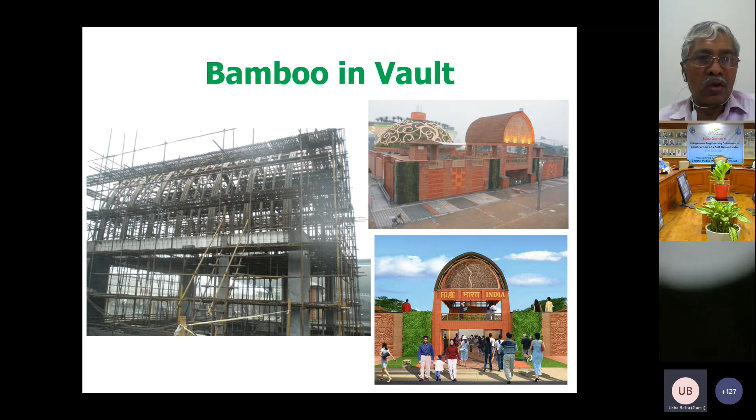Now connections are very important. How to make the connection of bamboo with RCC, that means with concrete, or with steel, or even bamboo to bamboo. Bamboo to bamboo, because bamboo has a length of only about 6 meters, as we discussed. But suppose a 34 meter diameter dome is to be constructed, or suppose 12, 15, or 20 meters is to be done, then how is it to be done? So connecting the bamboos together is also a science, or an art.

You see this bamboo dome, I told you it had a diameter of 34 meters. It was told that this is the largest bamboo dome in the world. So how was it done? Now you see here, because it is a dome, some of the bamboos went up to a certain distance, and some of the bamboos went on up to the top end. Now if two bamboos are to be connected, what did we do?

We inserted one steel reinforcement bar in one bamboo from one end, and from the other end the reinforcement was inserted into another bamboo. Because we drilled the hole in both bamboos between the nodes, micro concrete was inserted from there on both sides. So basically it was an RCC sort of connection between two bamboos, and it has adequate strength. It means that between two bamboos, without overlapping, the connection was through RCC. So that was done there.

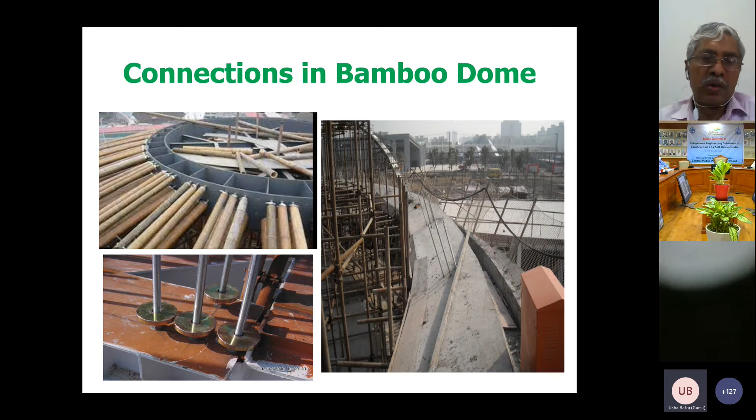You see here in steel, even a steel beam reinforcement could be welded, and then again in bamboo, we can have that housed stainless steel socket, and over that bamboo can go inside. So as I am told, on the right side you can see the steel is coming out, and then bamboo first that socket or steel plate will go inside, and then over that this bamboo will come, and then micro concrete or rich cement mortar will come inside. So this is how it was done.

We didn't have much of the literature, particularly the codes and specifications, so what we did was have this mock-up done. It had all the loads, a 34-meter dia bamboo dome. We had all the beams of bamboo on both longitudinal and lateral sides. Then over that we had an RCC slab, and over that a ferro cement slab. Then over that we had waterproofing treatment, and over that we had more than 2 lakhs of live plants. So that much load was coming, as good as or even more than the load we normally consider for RCC members. So this is how the construction was done.

You see that this bamboo is going up because of the shape. Any shape can be done this way - we did shaping. Over that you can see the RCC being done, and over this we had the next stage.

For waterproofing also we did a special arrangement, because over this we were not able to do it directly, so we did a PVC board, and then waterproofing first with geotextile, then PVC board, then over that PVC board we put all the plants - more than 2 lakhs plants - and then our workers were going for maintenance.

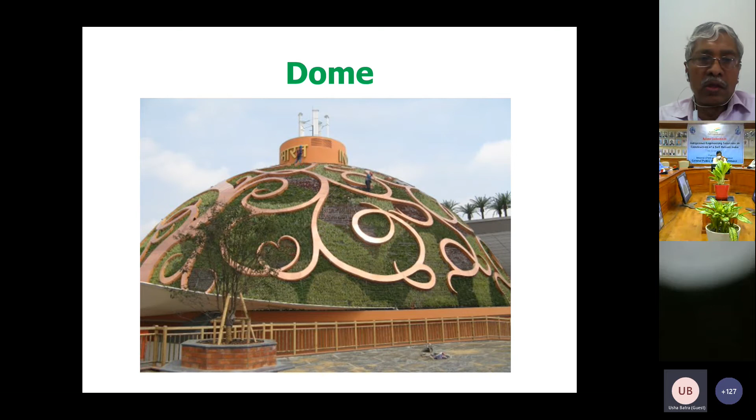So basically what I'm saying is that bamboo can be used as a structural member, and this, maybe in the future, particularly this treated bamboo, may be coming to replace as a construction material. I'm not saying that RCC will go away or steel will go away, but bamboo may also be one of the construction materials of the future.

So that is one. Two, again I am saying that treated bamboo is to be used, and this has a service life of more than 50 years. So durability is not the problem, and another advantage is that corrosion is not the problem, and there's a lot of availability, and the cycle of maturity of bamboo is quite fast. Those are the advantages.